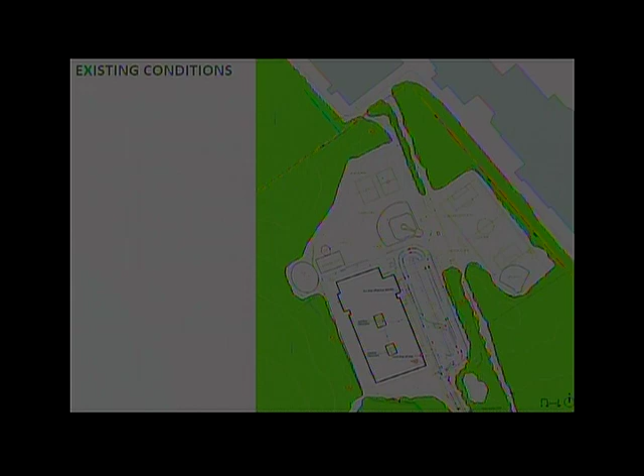We just had a meeting with the outdoor working group and spent quite a lot of time and discussion on this. So I'll just do a brief overview.

We have heard back from you all about how the existing parking lot is managed during pickup and drop off for buses and parents. This is an updated schematic site plan where we've incorporated some additional thoughts about parking and pickup and drop off on the site.

So the entry drive, still a bus loop to the south of the building, combined with the playground, which we've talked about previously here, and then parking to the east, and then a low ropes course and fitness play area that could be used by the gym to the northwest of the gym, a wetland gathering space and wetland walk here to the west of the school, a gathering space in the woods, and then the high school regulation baseball field would be here, and the multi-purpose field would be here.

This is zooming in within the play area that's combined with the bus loop. We were thinking of a combination of net climbers, swings, embankment slides, and stepping stones and logs for kids to climb and stand on. And then some of those low ropes elements here again. Basketball court here and a half court basketball in the bus loop.

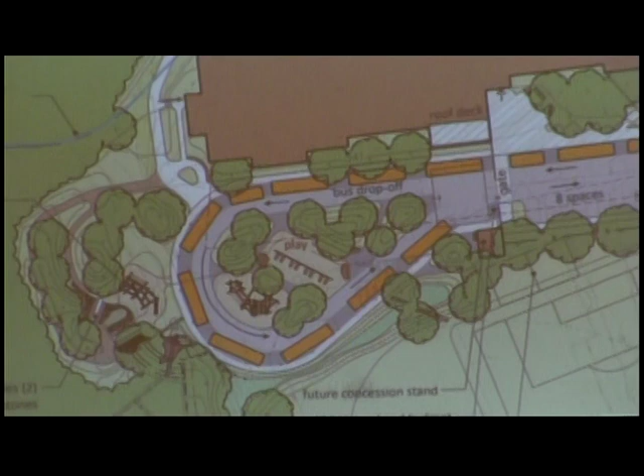This bus loop would be separated from traffic outside of pickup and drop-off times. From the working group meeting earlier, we were discussing ways to do it without a gate, with a chain, or with a raised curb. But when outside of pickup and drop-off, this would be a plowable play space. And then during pickup and drop-off, it would be used as a bus loop for the school.

There was some concern from various folks about this pinch point, so we've been doing some thinking about how we might be able to improve traffic here. The current plan shows buses turning left and then cars coming up in a dedicated turn lane here, turning right. So in this configuration there is limited conflict between left turning buses and cars turning out when the buses are entering the bus loop.

Some options that we looked at were a roundabout, which is pretty complicated and doesn't really solve the problems. And something like this that is similar to the traffic flow in the current proposal, but maybe a slightly different, more modest version of this may help improve traffic flow and ease the turning radiuses for different vehicles. So we probably will incorporate something in between this and what's currently in for the cost estimate.

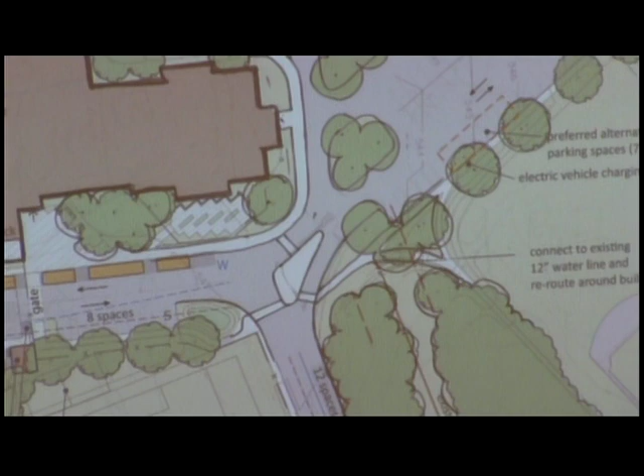We also have the roof deck with some simple planters in the corner, similar to what we have at the Jacobs School. It could be seating, picnic tables, and weather stations could be located up on that deck to keep them away from vandalism. And then another roof deck off the art classroom in the front of the school. So again, free play in front of the school, managed play in the back. Here's some images of some of those elements.

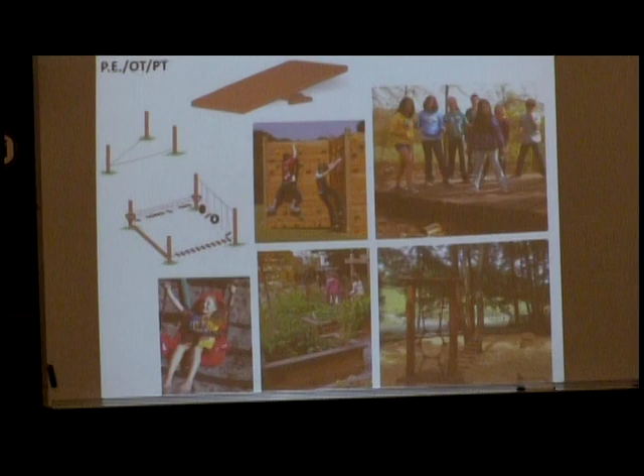Some things we talked about: Gaga ball, frisbee, volleyball, soccer and baseball on the major fields, and then basketball. Traversing wall, low ropes, swings.

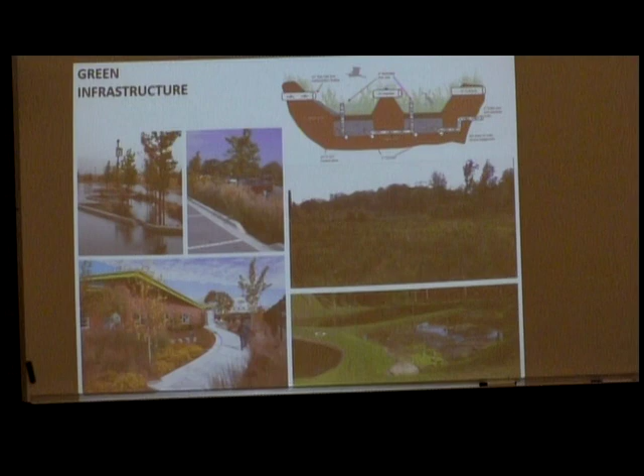So that's where we are with the site plan. Any questions or thoughts? Just about the paths to the outdoor classroom - what were you thinking in terms of how those would be created, maintained? Would they be decked the whole way through for accessibility purposes?

Yeah, we're thinking of an at-grade deck for the length of it. Any spaces in the wetland, potentially not a full deck with piers, but a low-key elevated deck on sleepers that would allow some water flow if we get into the wetland. Everywhere else would be an at-grade deck.

Okay, and was there any thought given to adding some kind of cross-country loop additionally around, like down the driveway and up? The sense for that - right now we have this additional gathering space in the woodland over here. So what we're thinking is that this would be part of the contract, providing accessible paths to these spaces, which begins to set up the framework of a loop.

And then the community could continue that loop into a full 5K course, including some of the existing non-paved paths through the site, like one that goes down, starts at the ball field and goes near that development west of the school. So it would be the beginning of a 5K loop that could be built on.

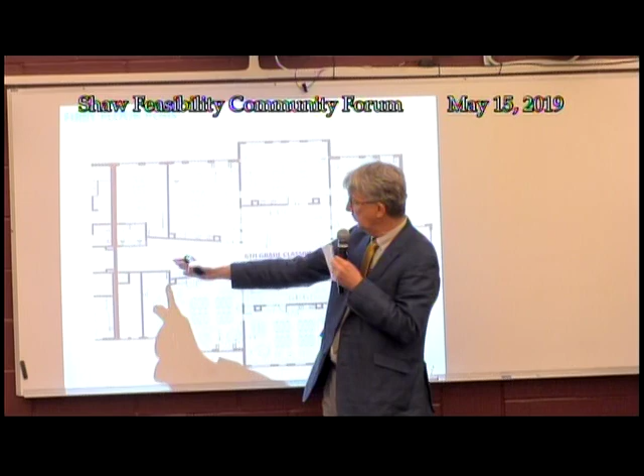So, plan updates. This is just to focus in on the 6th grade classroom wing, 5th and 6th grade classroom wing. So we did decide to elevate that one wing to work with the grading across the site. So just that one wing starting at this point is elevated. This is a slope walkway, not a ramp - there would be lockers along it. So it would be like a graded sidewalk and not a ramp, so there would be no requirement for handrails or anything like that.

And then we started to populate the classrooms with furniture. We're working with a pretty standard modular desk, because there was a lot of debate about use of tables versus desks amongst the teachers. This allows a teacher to configure desks together in groups of 1, 2, 3, 4, up to table size. That's the greatest flexibility for that kind of use.

Just starting to work with the model, starting to render the inside. We did meet with the materials working group last week and came up with an approach for the exterior windows and brick treatment, and the amount of brick on the interior.

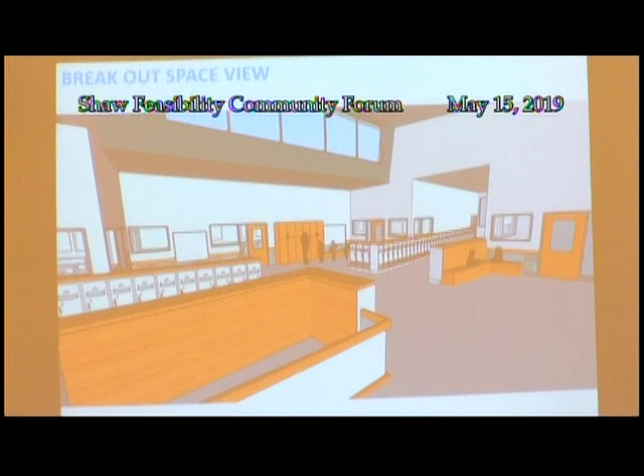A change since last meeting was the slope of the roof over the flex spaces. We had shown the slope of the roof running as a shed roof facing forward previously. Now we're running the shed front to back, which allows us to get clerestory north-facing light into this flex space rather than skylights. So it's diffuse light, there's no glare, and it eliminates skylights, which we think has a real benefit. And I think it reduces the height overall as well.

There will be a lot of wood. The lockers would be encased with wood.

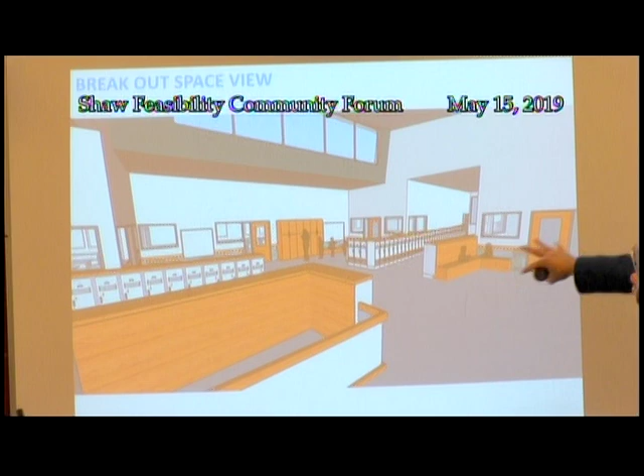These are the flex spaces beyond. This is the opening into the floor that would let light filter down to the lower level, and windows into the classrooms, but up high enough that when children are seated at their desks, they're not distracted by what's going on outside of the classrooms.

The media center. Since last time we met, we discussed with the school a bit more about the need to really secure this room off. We had shown it sort of open and permeable all the time without doors, but there's a feeling that with this school being used after hours a lot by different groups, like the junior high basketball league and so forth, that this room should be securable.

So we've adapted the design a little bit to have doors at either end. There's steps up to doors, and at this point you enter and can run down a slope walkway to the lower level. The media center is depressed about 2 feet, so we get some height in there because the outdoor classroom is above it, and we'll have a bit of a dropped roof structure to support that.

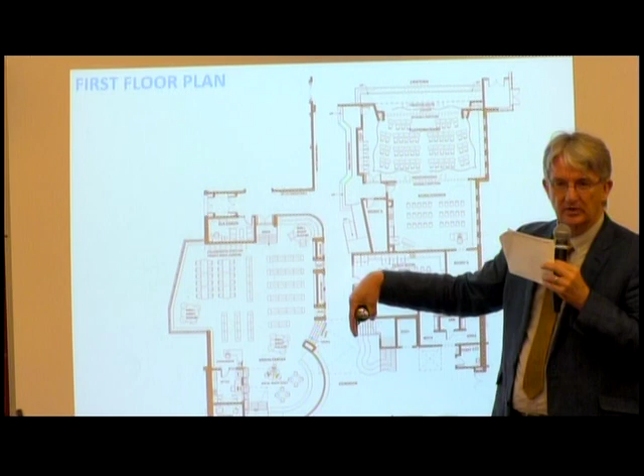We'll have one opening here into the media center that will be stepped, kind of associated with the grand stair that will also expand out to this large seating area in the hallway. This will be gated with either a security gate or something like that. It won't be an egress door, so it can be closed and not open after school hours. Ingress and egress would be through these two doors.

We've also developed the side of the stage. There's an elevated ramp, a true ramp going up to the point at which you would transition to the music room or to the back of the stage.

Along the corridor, we've created this sort of stadium seating for a gathering space as well. So it's not just a hallway—with possibly a whiteboard along here, something could happen in that space along the corridor. And the music room and stage are very multifunctional.

There'll be a horizontal sliding curtain, so it looks like a traditional stage with a curtain drawn. There'll be an operable partition that will rise up out of the way to allow it to be used as a stage, but closed during the day, and perhaps the curtain drawn to allow the music teacher to use this space for music lessons. And then there'd be a back curtain that would enclose the back of the stage when it is used as a stage.

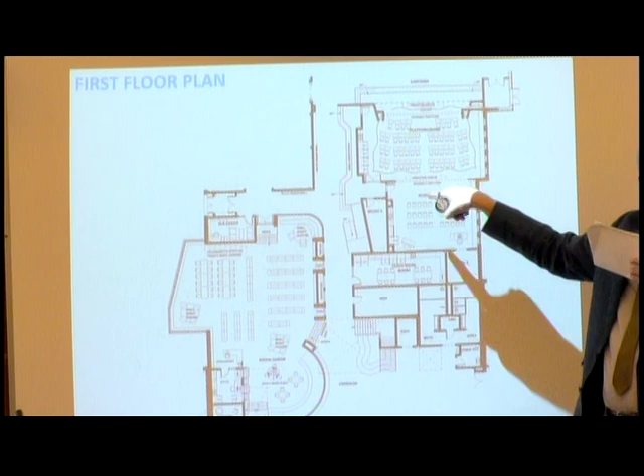We're still working with the school to determine whether there's a need for a movable partition here, but we're showing one now between the two music rooms to allow the greatest flexibility.

Any questions or thoughts? How many students would you foresee being able to fit in that hallway space adjacent to the stage?

Probably a classroom size, I would say, maybe. Kids can squeeze together on those things, maybe up to 2 classrooms potentially. Some kids on the floor.

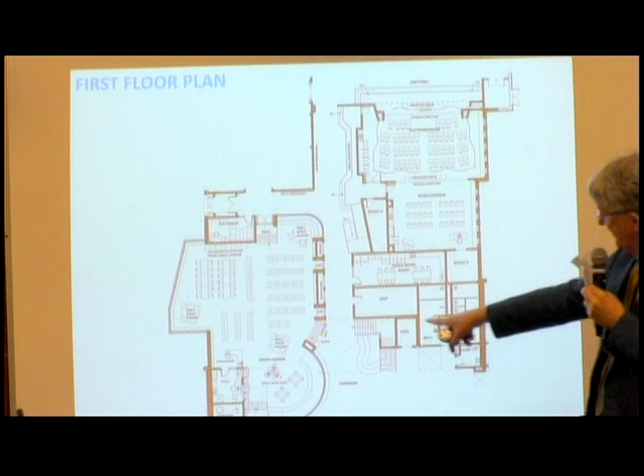So it's just trying to provide multiple places for gathering. So this spot here, this spot here, this spot here.

The gym, so we did bring this up at the materials working group just because it came to our attention that we were showing a junior high size basketball court in our gym, which allowed us to have bleachers that seated 210 people. But we learned that the junior high league really works now with a high school sized basketball court, and they would prefer a high school sized basketball court.

So this is the plan showing the high school sized basketball court in the allotted 6,000 square feet that the MSBA allows. And the greatest number of bleachers that we can get is about 125 fixed bleachers. They wouldn't be retractable or movable bleachers, they'd be fixed on that west wall of the gym.

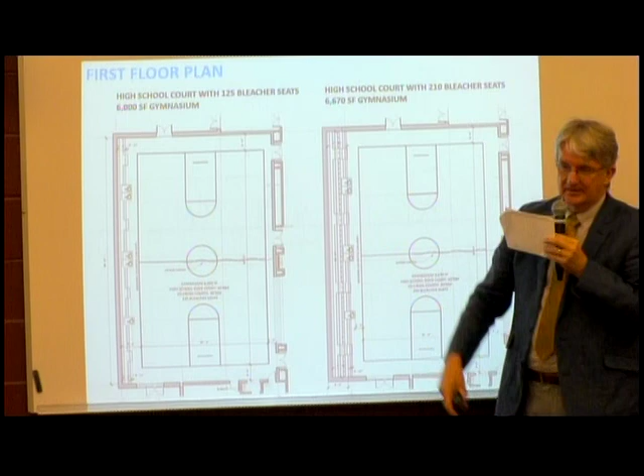So the thought came up about possibly expanding the gym slightly to get back to that 210 number, roughly. And we determined that we could do that and have adequate safety clearances around the court by adding another 670 square feet to the gym. So we are going to price that as an alternate during schematic design and see where that goes. That would be non-reimbursable cost, but it seemed in that group that it's a really important feature for the school and the community, and something that might be important for the success of the project to get to that size and that number of seating.

Any thoughts about that? Thumbs up.

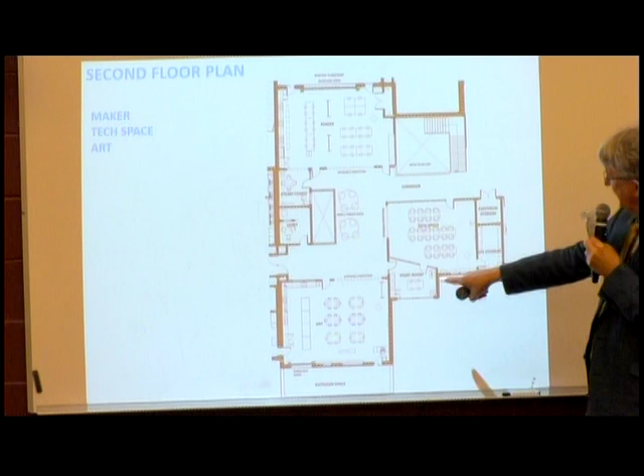Second floor, so we've developed this middle space a bit more. Zoom in on that. So we've got the 2 maker spaces on either side of the central corridor, the art room here. We're showing a shared print room between these 2 tech spaces off the corridor, and also accessible from the corridor for other people. So this might have the 3D printer and that kind of equipment in there.

We're meeting with staff to talk about how these 2 spaces might be fit out, whether they're the same or a little different. But we are looking at operable partitions in each of these spaces that would allow them to open up and flow into that main corridor.

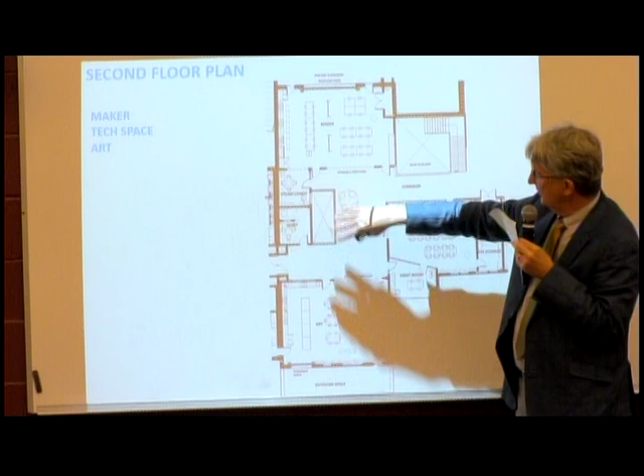We do have a big opening in the floor here. We'll have some daylight from windows here coming into this space down to that main stair. Another opening here that lets some light down to the library, media center. Large operable exterior door going out to the rooftop classroom, and 2 means of egress from the rooftop classroom, 2 means of egress from this room to the corridor.

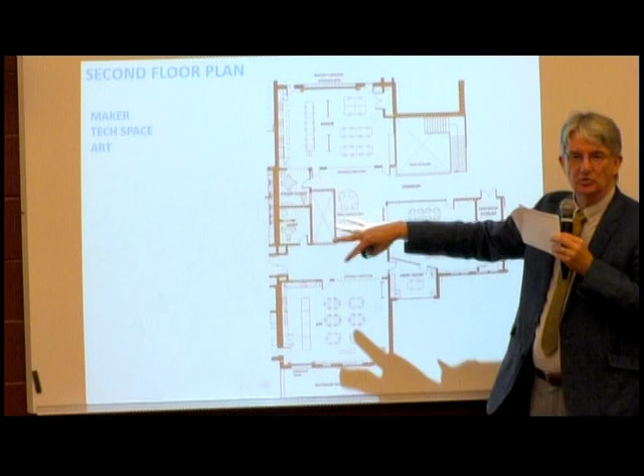And yeah, that's about it. And large enough space for other things to happen in this central core space in the corridor, and not just be a corridor, some small group gathering spaces near that opening in the floor.

So we talked with the materials group about different types of operable partitions or where we might use them and employ them. So this is the exterior. We reviewed 3 options, and this is the one that folks decided to go in the direction of. It's basically a single unit that just rises up, half interior, half exterior, cantilevered. And that would be the one at the makerspace out to the rooftop classroom, and then also the art room to the front rooftop area.

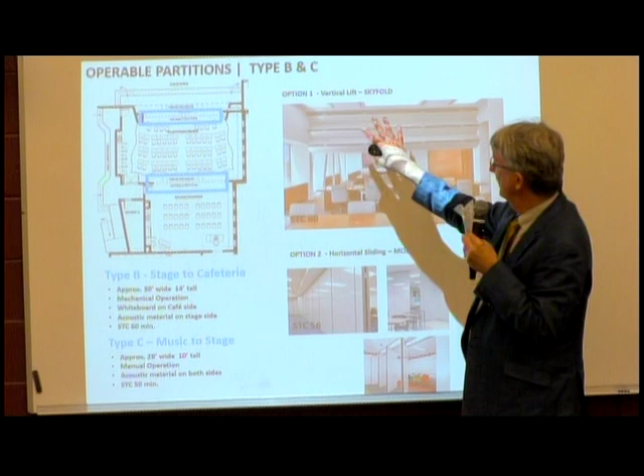And then interior, operable partitions. So we're looking at this skyfold door, this kind of door. It's an accordion door, but it's got a high STC rating that would drop down and close the stage. This can be whiteboard material or acoustical material. So this would close and allow this to be used as a classroom, and open and disappear and allow it to function as a stage with a horizontal sliding curtain in front. There'll also be a projection screen out front here that would drop from the ceiling.

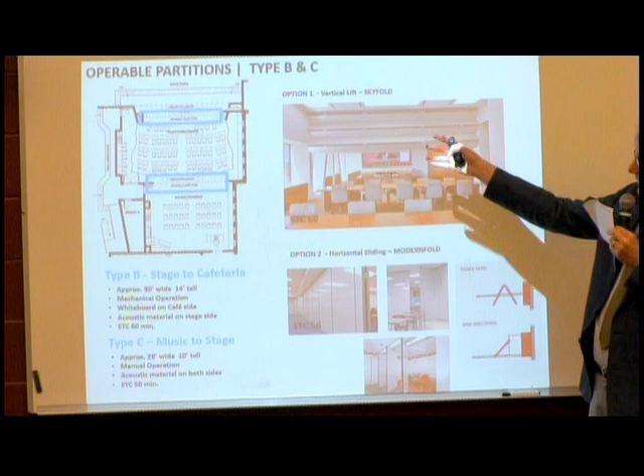And then, again, we're still discussing whether there's a need for an operable partition or whether this could be a permanent wall here. But if we do an operable partition, it would be this kind of demounting 2-panel system, a manual system that would move off to the side. So this and the 2 previous ones that we showed for the exterior use would be mechanically operated.

All interior classroom to corridor partitions have to maintain a minimum STC rating of 38. This glass folding partition is similar to the previous ones I showed, demountable in 2 panels each, manually put aside, except these are glass.

We showed several options of these to the materials working group, and folks liked the one that didn't have a floor track in it, that didn't require anything on the floor. So we'll be pricing those out for schematic design.

Any questions about that stuff? So then at the first meeting we had with the materials working group, the group focused in on a few images we brought of 3 projects that were very traditional brick, predominantly masonry. Of course these all had sloped roofs, and we've made the decision to move away from sloped roofs to save costs. So we're still trying to work with this aesthetic of mostly brick and some other material.

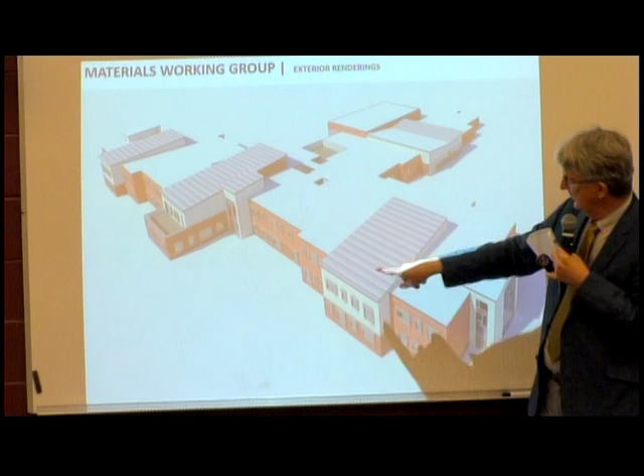So this is the beginning of what this is going to look like, or might look like. As I said at the last meeting, these roofs we had sloped, so the high end was off to the side and the low end over here. You saw at the front the sloping gable. But what we thought would be nice would be to slope them front to back.

For one thing, to get daylight into the flex space in the classroom corridors without skylights, using north-facing light, and also to have all of this roof area that's shown sloped, including here on the cafeteria, be free from any mechanical equipment and totally dedicated to photovoltaics.

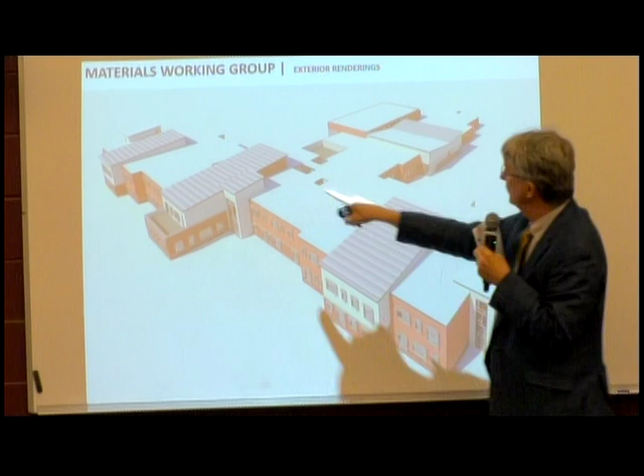So all the mechanical equipment would be on the flat roof sections in between. A stair would bring you access up to here, and because these stop at the back side of the flex space, you can move across them to the other roof areas, and from here to the rest of the roof.

We think that would be pretty dynamic and a real statement on the front of the building, having the PV there. So we're detailing it out mostly brick with an alternative material right now that we're specifying as a metal shingle, sort of a diamond shingle, brick pattern, kind of a Flemish bond, and screens on the windows, shading screens that shade the east angle morning light and also southern exposure.

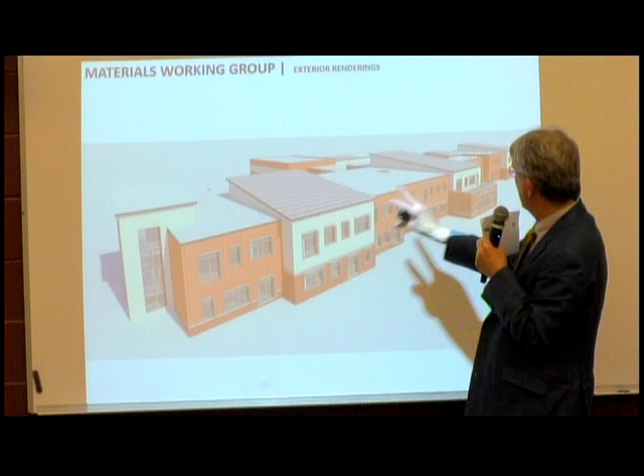A little closer in, a little detail in the brick from the windowsill up, a different type of treatment at the base that might rise up here, where we change materials at these pop-out areas with a sloped roof, that might be metal. So pretty simple form, pretty simple structural grid, and pretty economical overall.

This material, we showed several materials in the past, GFRC, a concrete material, or metal, and they price in about the same range. So if we decide to change that in the future, we can change that as design develops.

So that's an angle from the southwest. The bus loop playground would be right out here, and the main entrance is over here. This is the east classroom wing. You can see the roof steps up here slightly for that 2-foot grade difference over there.

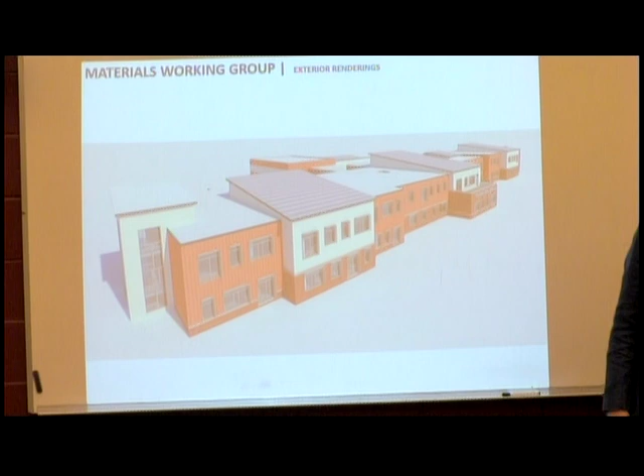And then again from the opposite direction, from the southeast looking toward the building, the main entrance. We haven't developed the entrance canopy yet, we're going to spring that one on you later, but we'll carry a budget in schematic design for that. We just haven't been able to focus on that yet, but we will have something interesting there, and probably will incorporate some bicycle storage under that as well.

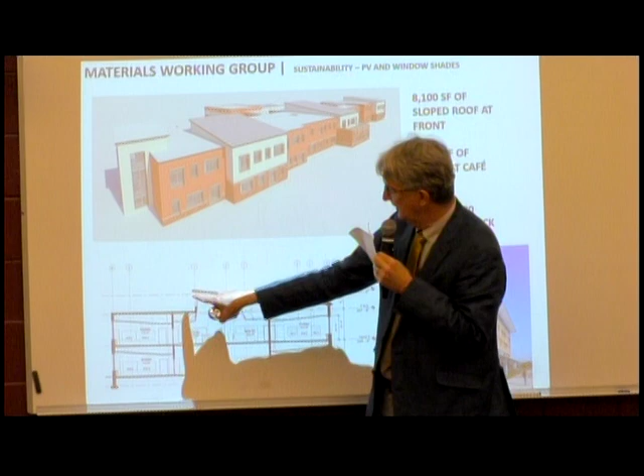So this is just a section showing you how that roof runs from the front, slightly higher than the flat roof, runs from the front to the back side of the flex space with those north-facing windows letting the light in, which you saw in that rendering. This being the whole flex space in the corridor running down the middle, classrooms either side, lots of room here for running mechanical equipment.

And we determined just with the slope roofs alone, we can get an 81 kW photovoltaic array, about $250,000 cost roughly, and a 9-year payback.

So right now we're looking at specifying a window shading device, something like this, that could evolve as we get into design development, but it gives the opportunity for adding some color perhaps. And the windows themselves could also provide an opportunity for color. So in the classroom, every classroom has this series of windows, and that large window is the one on the interior that was the window seat that had the feature surround on it in the classroom space.

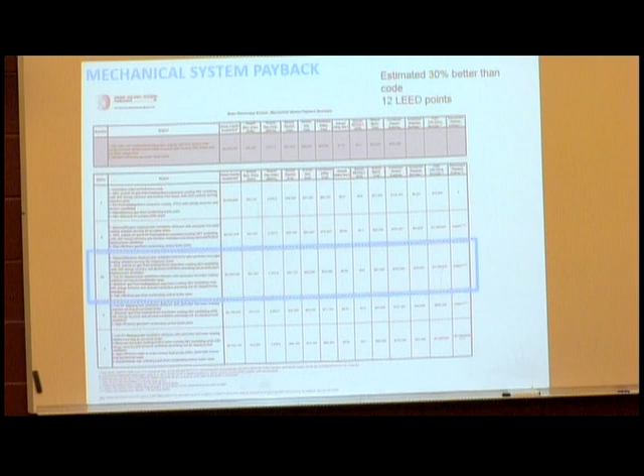So, mechanical system payback. Our engineers were here a couple weeks ago. They've taken our model and all of the design elements, the building envelope, and looked at several systems. I handed out a sheet, and what we're carrying forward is option 2A, which is the displacement dehumidification system.

It also air conditions certain spaces: the cafeteria, the gym, the media center, administration, and special ed spaces only. It's a slightly higher cost than option 2, which is only dehumidification with no air conditioning, but not tremendously more, and it has an instant payback.

Their estimate is that it will perform 30% better than code and will achieve 12 LEED points in optimized energy performance, well above the requirement for MSBA for the 2% reimbursement in that category.

Any questions on that?

So, alternates we're going to be looking at. The first one is the one I introduced earlier, the expansion of the gym to achieve a larger count of bleachers. We thought, at least for information, we'd bring this at the end of schematic design for inclusion or not, but for consideration. Then there's the shed exterior to the building, which we're showing off the rear of the loading area, not far from the generator and the transformer.

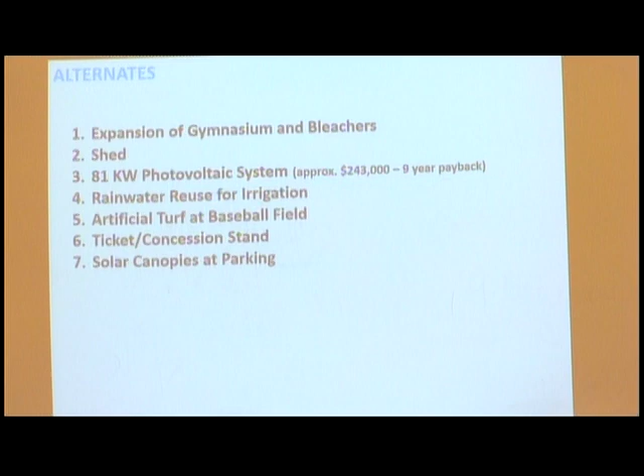And we'd also have to bid it — public bids take the alternates in order. You can't take item 3 without also taking items 1 and 2. So it's a decision you really need to think through and decide how you want to participate in doing these.

If photovoltaic is a major design element, you might want to say the ones you see on the roofs become part of the base bid, and if you want to go beyond that maybe on PV, that becomes an option.

I'm going to say expansion of the gym is something that's very important. The shed is too, but you can only take so many in given bids, so it becomes something you need to think through and prioritize.

So, proprietary items — we've brought this up in the last couple of meetings. We have basically 2 items that we'd like a vote on for proprietary items. I think the building committee votes on this; the building committee needs to vote, and then ultimately the school committee has the ability to vote. So that's the motion, and those are the 2 items that need to be voted on if you care to take that vote now.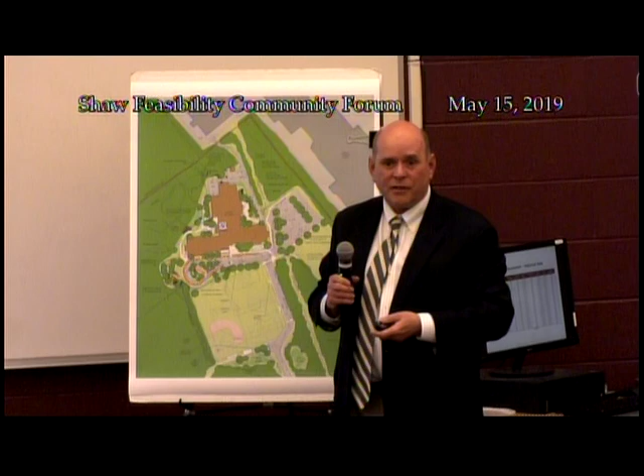We're not going to really know what the final numbers are going to be until we get the estimate and work through all of what is eligible and what isn't. That's why I want to bring it to the community so you're not shocked when you see us coming through and saying, yes, your reimbursement rate is 61%, but when you talk with the community at the vote, they should know their effective reimbursement rate is going to be something less. That's really the story we wanted to bring tonight.

So not knowing what was ineligible for Douglas, they were at 62 and ended at just above 50. They're sort of in the same range. Historically, you look through and every project has a different story, but you're looking at a 10 to 12, sometimes more, difference between what the MSBA says your reimbursement rate is and what the communities actually got.

And for instance, the more of those alternates you select, the lower your effective reimbursement rate is going to be. Those will be carried by you 100%.

So I just want to be clear, because it kind of sounds like a bait and switch going on here. That's why we wanted to bring it up.

So over the next 7, 8, 9 months, one of our talking points in the community is going to be we're eligible for 61% reimbursement. We're shooting for 61%, 61%, 61%. That's what we're going to keep repeating. And then we could literally come in and get 50% reimbursement. You will, yes, you won't get that 60%. Then why would we keep telling people that we're eligible for 61%?

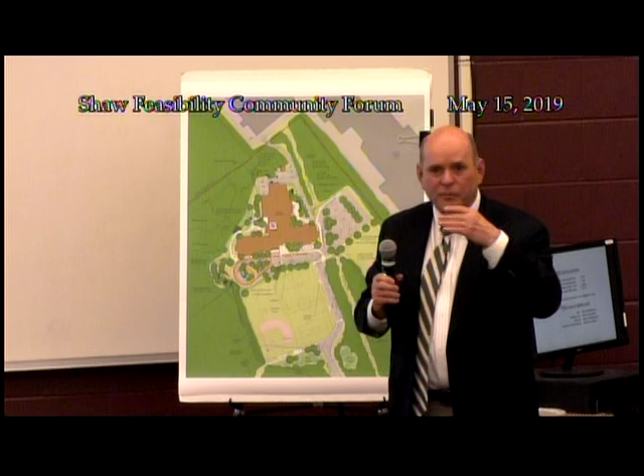That's why it's very important to make sure we build everything the community wants into this estimate, that we make all these design decisions at schematic design, so we have a confident feeling that we've got enough money in the budget to build what it is that we're presenting to you.

So one question is, we carried over this slide into the community forum, and whether you want to present that. I guess, to the Chair, I want to present this to the building committee. Is this something we want to discuss with the community?

It's usually something we discuss once we have the real numbers, and we explain to them what the reimbursement really is. Usually at this point we're more focused on the design and what a wonderful school it's going to be, as opposed to getting into the nitty-gritty of reimbursement. It's part of the presentation, but we can put it toward the back of the deck if that's the will of the committee.

I think maybe putting it back for a while. Okay, I'll just eliminate these slides. Yeah, you can just take it out, because I had gone through the budget thing in there already. So, very good, because we don't really know the number ourselves.

Well, that's why I wanted to make sure we're not giving you an estimate at this point. I don't want to put a number out there, because once we get everything in, it's going to change a bit, and I don't want to put a number out to the public and have it change. I agree.

Okay, very good. Oh, we still got to adjourn the committee. Oh, really? Okay, I'm just... No, we'll just wait, we're going to bring this up.

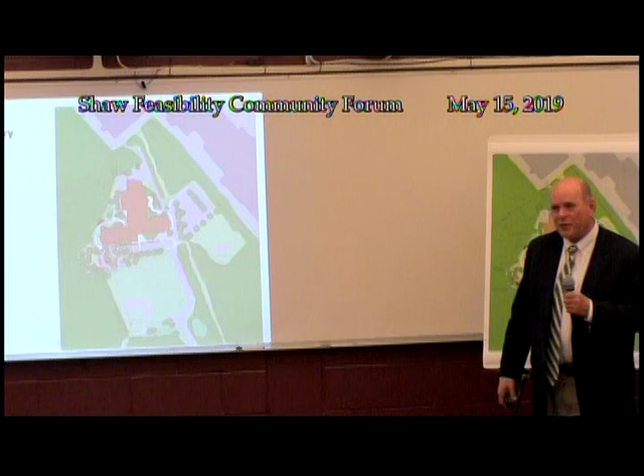There we go. Thank you very much, Greg, and thank you, everyone, for coming. I'm David Billings, I'm Project Director at Hill International. We're the OPMs on the project, and we'd like to do a quick recap of the process we're in.

As you know, we've been invited and we're partnering with the Massachusetts School Building Authority to build a new Shaw Elementary School. This is the project team. We're really working with the community and through the community to do this. Hill is the project manager, and T2 is the design architects.

The town was invited in 2017 into the MSBA's core program, one of only 15 communities that were invited that year. So you can see this is a very competitive market to get into the MSBA core program, and it was very exciting for the community to do that.

The MSBA invited the town to look at two options: a grade 4 to 6 school for 415 students, and a grade 3 to 6 school for 550.

We've gone through the eligibility period and then started the project team. The project team came on in spring and summer of '18. We have completed the feasibility study, and the conclusion of that is to build a new school for grades 3 through 6.

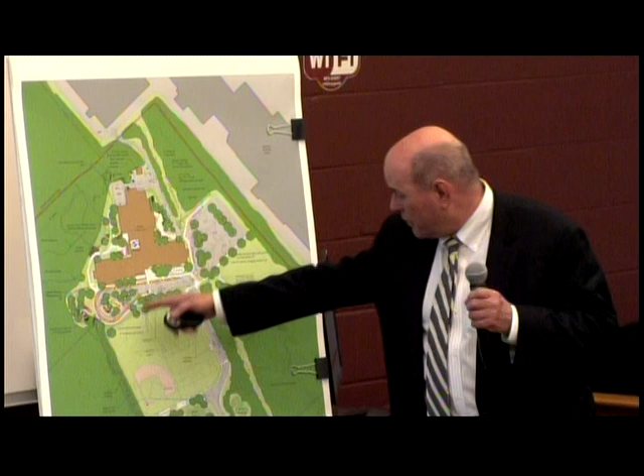Then we'll take down the existing building once the kids are out at the end of June, and construct the fields and the rest of the parking lot. The building will be open for the fall 2022 school year.

During the schematic feasibility study, we looked at all the different options: renovating the existing building, doing additions of various sizes and different grade configurations. We looked at two different building options, and the decision was to go with option C5, which is this design. We did cost estimates of each of the different options.

We're now looking at an option for C5 that's between 56 and 58 million dollars in terms of total project cost.

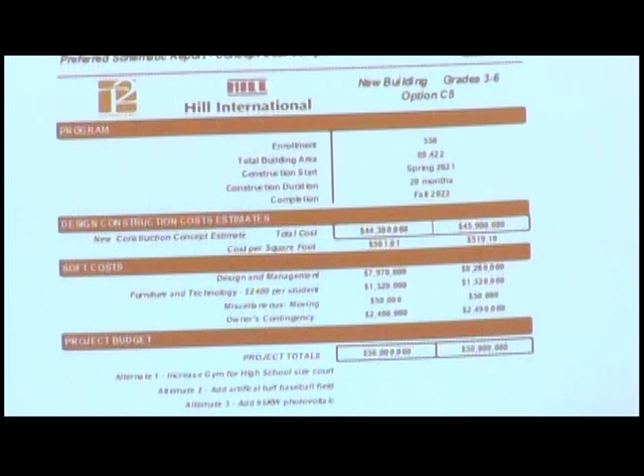We're looking at a bunch of alternates, but this is the concept cost that we've developed, and we think we're going to be fairly close to this. We will be presenting our final estimates and project budget to the building committee by the end of June, so that we can submit to the MSBA in July to make their August board meeting.

And on that, I'm going to turn it over to Peter.

Hello, everyone. I'm Peter Churowski, Principal Architect with T2 Architecture. I'm going to turn it over to our landscape architect right away, Peter Flinker from Dodson Flinker Landscape Architects.

Just to orient you, this is the existing school building, the existing parking and bus turnaround area, and ball fields to the north and east. As you know, the idea is to keep this school open, so that limits the options of where you put the new school. It's been determined to put the new school in the north part of the site, keep this school open, and then when it's done, tear down the old school and old parking lot and replace them with a large combined baseball and multi-use field.

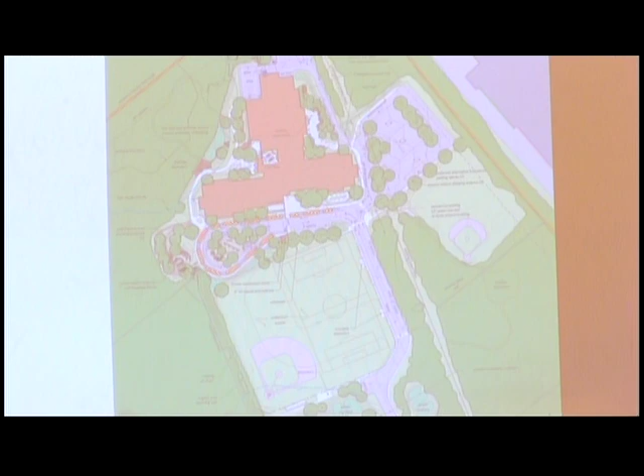The idea is to keep the existing pavement along the edge as the main arrival to the campus, and then when you get to this point, the buses will go into a bus loop—buses only for drop-off and pickup. All parents, visitors, and teachers will go to the right and park in a parking lot to the east side of the school, with drop-off following the outside of the parking lot, dropping off in front over there.

Here's an easier view to see—essentially 3 lanes approaching the school, or 2 lanes approaching and 1 departing. Buses turn to the left into the bus loop. Parents and teachers pull around here, so there's plenty of room for parents to queue up along the sidewalk and drop off in the morning.

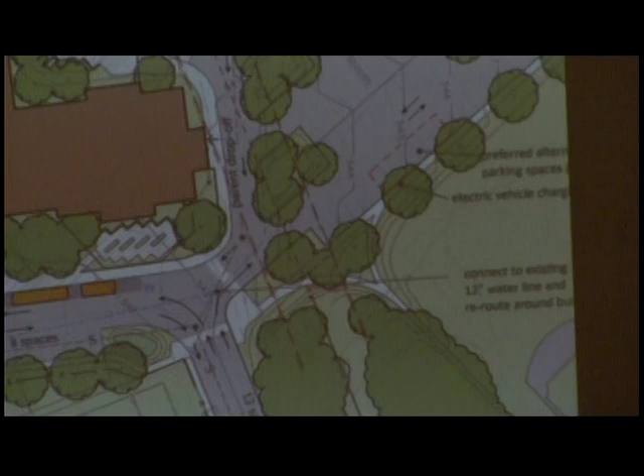In the afternoon, if they need to park and go into the school, they can use these parking places on that side. The idea is to separate bus and car traffic. This also provides the benefit that after the buses drop off—which is a relatively brief period in the morning—this area can be closed off with no more traffic, becoming part of the recess playground system. They can use both the hard surface of the paved bus loop and, within the center of the loop, space for play equipment.

We've been working very hard with the committee to figure out what kinds of play equipment might be appropriate, what's needed for the different levels of school children, and so on.

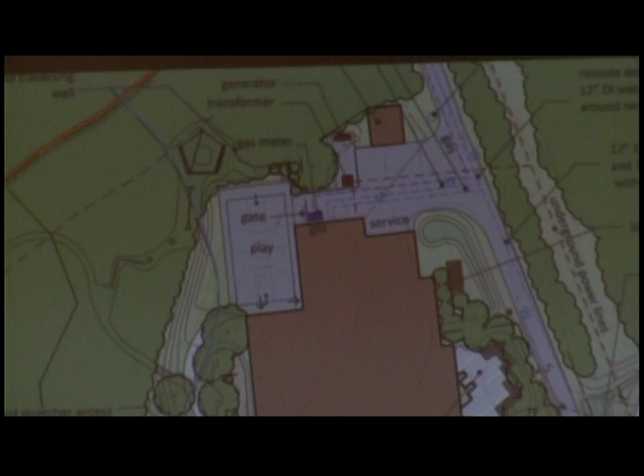There's wonderful opportunities for outdoor play and outdoor gathering spaces around the different parts of the school. On one side there's a general arrival space and an outdoor space outside the cafeteria. On the north side there's service access, truck drop off, and transformers, keeping that out of sight while providing convenient access to the cafeteria and kitchen. Outside the gym will be a paved basketball court and outdoor play area, which also opens up opportunities to use space within the woods for a low ropes course and other ideas that bring kids out into the landscape as part of the school curriculum.

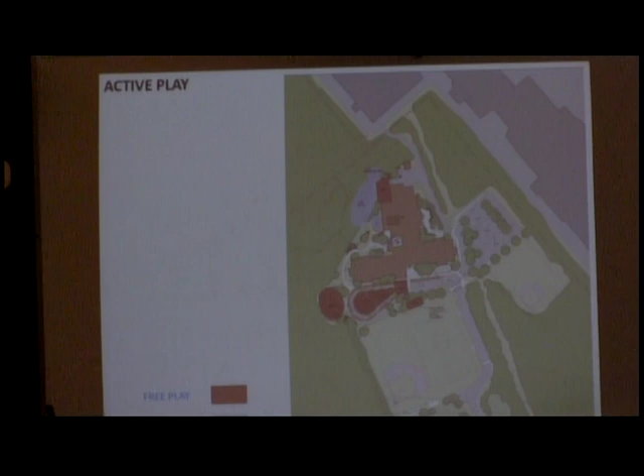During recess, students will come out in several different areas. Younger students will use the large playground area immediately outside the 3rd and 4th grade classroom wing, while older kids can use the ball fields and possibly a volleyball court and gathering space. Outside the center wing will be a courtyard that could be used for physical therapy and occupational therapy, along with garden spaces and outdoor classroom spaces including water-related experiments and water play, plus access to a nature trail going out into the wetlands. This is a diagram of that, with red being active play areas for free play at recess, and blue being physical education and occupational therapy spaces.

We're in the midst of looking at lots of different options, a lot of interesting things that could happen at this school because it's surrounded by so much interesting open space, this wonderful forest, and a rolling landscape. So we want to incorporate the new equipment to really literally fit into that surrounding landscape.

Instead of slides that are freestanding, we can set the slides into some of the slopes. Instead of just climbing up the edge of a slope, we can have stepping stones or stepping logs, and structures constructed out of logs with nets to provide maximum interest, engaging both the body and the mind. So rather than the same kind of play equipment kids have seen everywhere, it can be much more engaging.

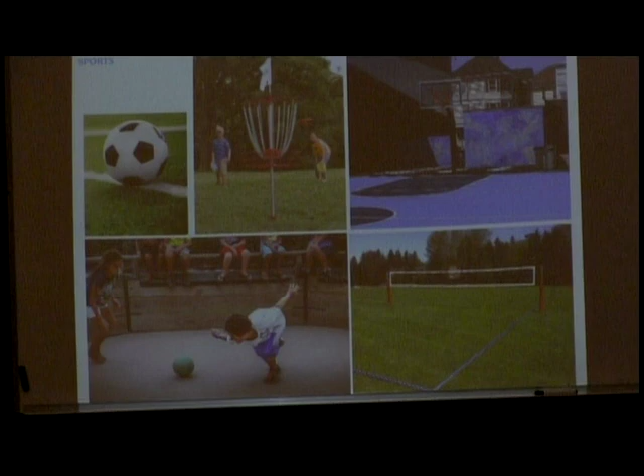In terms of active play, we're looking at different elements such as volleyball and basketball courts, but also possibly disc golf and even a gaga pit, which you should ask your children or grandchildren about if you've never heard about it.

As part of the school curriculum, we're thinking of having a low ropes course, which provides opportunities for kids to get out into the landscape and solve problems and do activities together. This would happen in some of the outer areas outside the gym. On a balancing table, you learn to work together to literally balance that rocking platform. There can be traversing walls designed as climbing walls, but instead of going up, you go across—engaging activities that help kids learn about using their bodies while having fun.

Then there are more formal gathering and outdoor education spaces. We already talked about accessing the wetlands north of the school with a nature trail. There's also a wonderful opportunity to bring a trail out into what's essentially a natural amphitheater in the woods south of the existing small ball field.

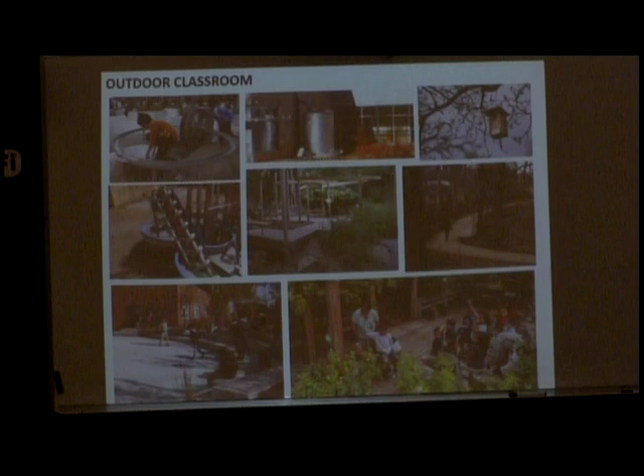Outside the school itself, there's a series of entry plazas and potential garden spaces and outdoor classroom spaces, bringing the activities of the school into the outdoors. One idea is to build on the history and culture of Millbury by celebrating the use of water and water power, which kids learn about in class, but then can actually use and play with—water stored in a tank coming off the roof and released into a variety of engaging activities where kids can learn how water power works and operate different machinery.

We're really trying to incorporate this idea of green infrastructure, which is going past the traditional gray infrastructure of a catch basin and a pipe going out to a stream, and replacing that with spaces that capture the rainwater in a more natural way, where you have a garden that also is holding rainwater.

That can look like this in a parking lot. It can be a low spot at one end of the parking lot that helps hold the water, but is also filled with plants and flowers. In the landscape, you can have areas that look like natural wetlands, but they're also carefully constructed to hold that water and prevent stormwater erosion, while also providing an amenity to the campus of the school.

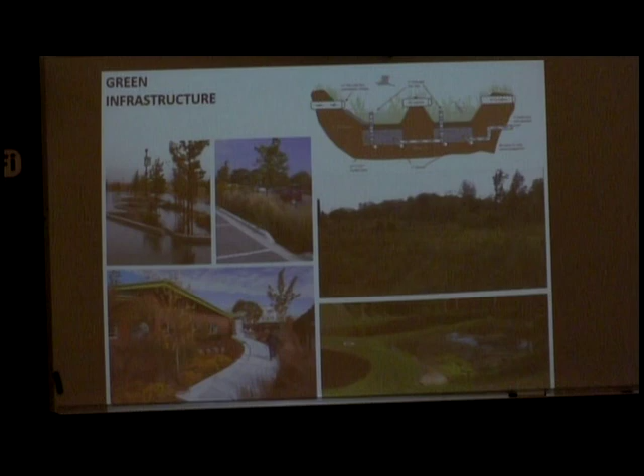And that's the end. We want to take any questions about outdoor spaces before we turn our attention indoors? All right, then.

I'd like to say that we've been working with this building committee, but we've also been working in small working groups, which have included people from the building committee, staff from the school, and members of the community on topics like outdoor uses, the ball fields, sustainability and sustainable features of the building, security, materials, and durability. There's been a lot of individual small group meetings to work toward these solutions.

So this is the final plan as it's developing. It's a 2-story building, and again, it's for grades 3 through 6. So grade 3 will be moving up from Elmwood and joining the Shaw School.

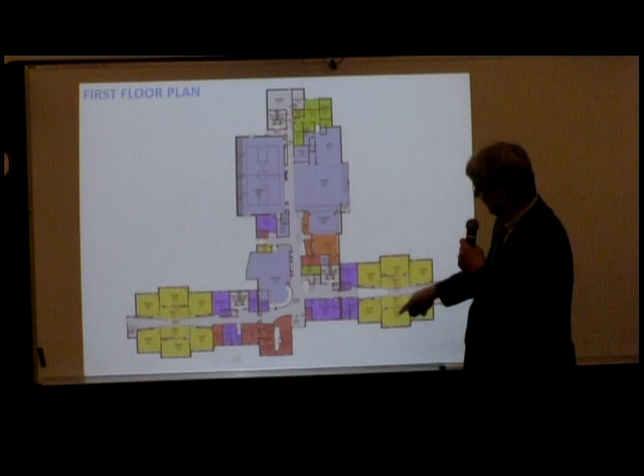Essentially, the building will be designed with a classroom wing at the front with administration in the center and a main entrance. This entrance would be the secure entrance, the only point of entry during the day, with good visibility into the office and a 2-step system of entry into the school. An SRO office, so the school resource officer would have a space here at the school as well.

On either side would be classroom wings. The classroom wing on the left would be grades 3 and 4, and on the right would be grades 5 and 6. The classroom wings are grouped with basically 6 classrooms per grade, in all grades but 3.

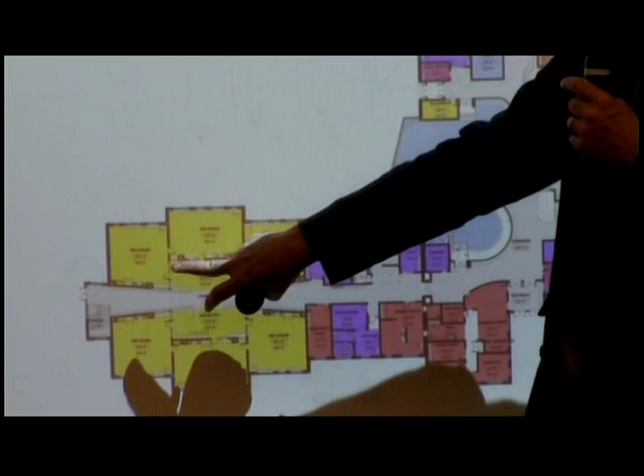The way the school functions is that they team teach, so there are 2 teachers for a core group of children. One teacher focuses on math and science, and one focuses on English language arts and social studies, so the children move between those 2 classrooms. The 3rd grade would be in their homeroom.

Exterior of the classroom is a shared space for small group work. Education isn't like it was when many of us went to school, where we sit at a desk and the teacher's up at the front pointing to a lesson on the board. It's much more dynamic, with a lot happening in a classroom and different group sizes working collaboratively, so this gives the opportunity for small groups to develop out here, maybe even across classrooms.

The purple in the plan are all the support spaces, so tutorial spaces and special needs spaces close by to the students they serve, unlike some of the older schools where they were off in a corner at the back of the building. Again, administration and health right at the front.

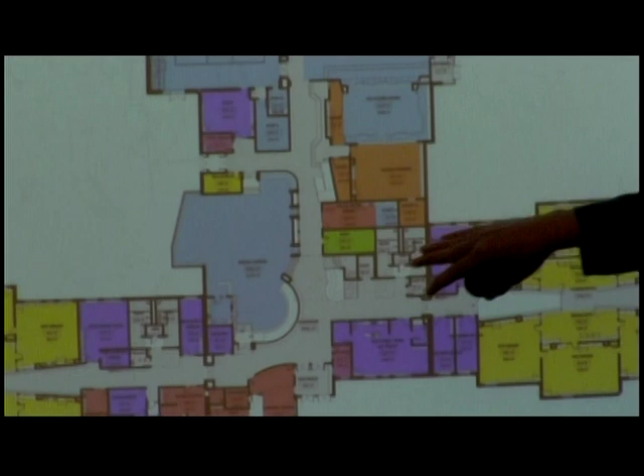The media center is right at the heart of the building. Right now at Shaw School, the media center is sort of in the middle and separated from the gym and cafeteria, but it would be very useful for the very active after-school program. This placement in the core of the building with the cafeteria, the gym, and the media center makes it much more functional for after-school and community use.

Essentially, this blue section of the building is the community use section: the media center, the gym, the cafeteria and kitchen, and a stage. And the building could be secured off here at these wings, so nobody could get beyond there after hours.

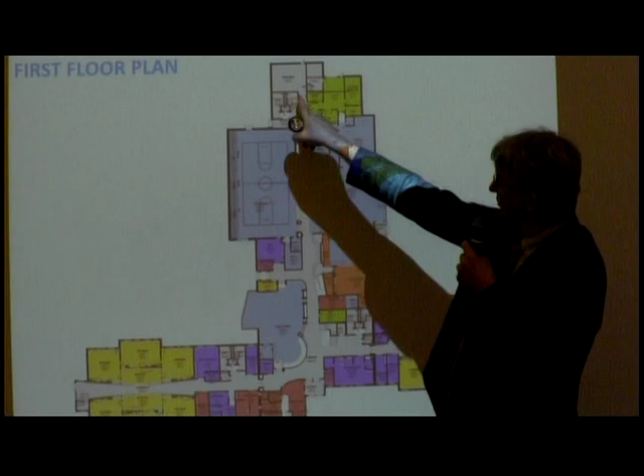There'd be a separate entrance into the cafeteria. There's also an entrance from the outside to the back of the gym where there are restrooms and an interior door that's locked, so this could be used possibly after hours when there's a game in the field and restrooms are needed.

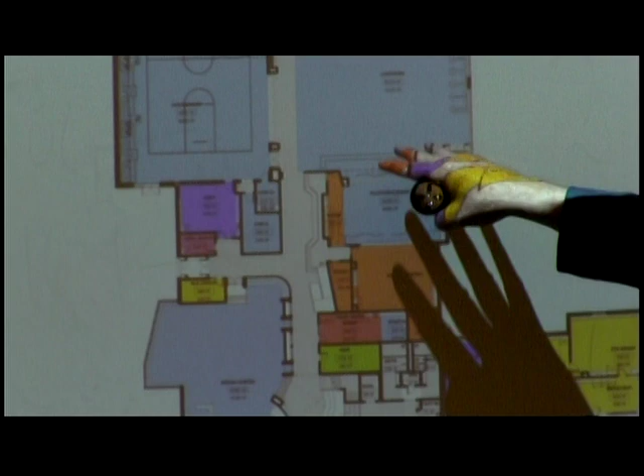So a large gym that has a high school-sized basketball court to serve the junior high and other community leagues. A large cafeteria with a stage, which is shared and paired with the music room, so the music room can expand into there, and this will be a very flexible space with movable partitions that allow it to segregate off and be used in different ways. And a large welcoming stair at the front, and then fire exits at the end.

This is a close-in look at the typical classroom cluster. So we're working with pretty standard, economical modular furniture that can be arranged in a variety of ways, clustered together to create table situations for group work or individual desks, or just grouped in numbers of 2 around the room.

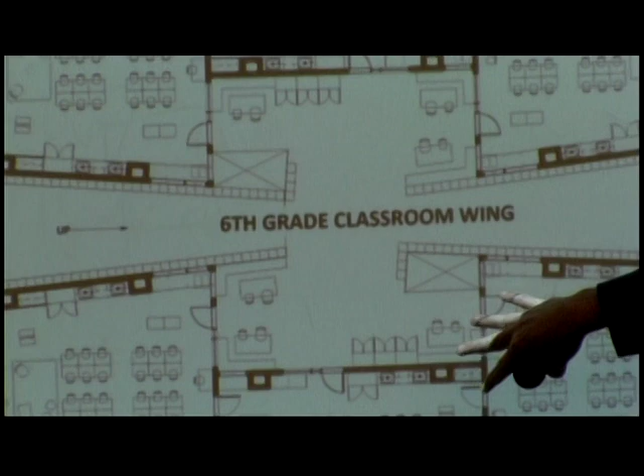So these are the individual classrooms surrounding the core flex space. There'd be individual little tutorial spaces right outside the classroom doors here where students could meet with a special instructor, or work independently outside the classroom with good visibility, a lot of glass here so teachers could keep an eye on students working independently.

One thing I didn't point out is that the main axis of the classroom corridor runs east and west. So all the windows are facing either north or south, which is the best orientation for solar control and glare.

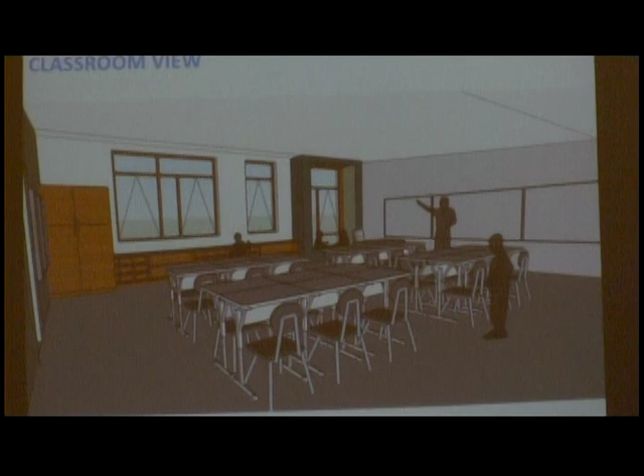This is a quick view of what the interior of a classroom might look like toward the window wall. We're trying to work with a module opening of 8 feet or less that will allow simple construction methods for supporting the openings on the exterior.

We're using a lot of brick, reflecting some of the mill buildings in town and mill architecture, which have very standardized mill punched openings in brick, but making it a little more playful with different breaking up of sizes, and one special window in every classroom that might be a window seat where kids could gather and work together in a small group.

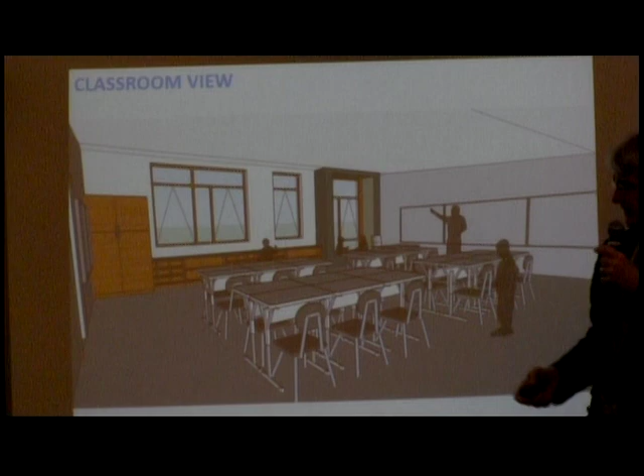So trying to develop as many of these smaller spaces where things can happen aside from just the general classroom.

This is the flex space that's at the center of a classroom cluster of 6 classrooms. So the corridor runs through, but you can see it flows together side to side. The lockers separate off these small spaces outside the classroom where teachers could keep an eye on students or specialists could work with a student.

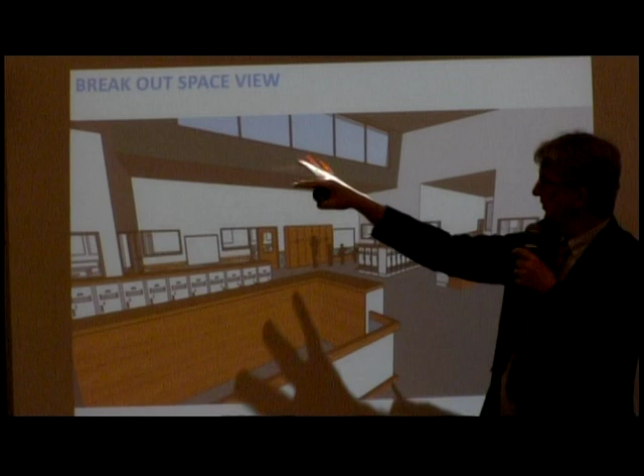We're developing this idea of a clerestory, letting light in from the north, so there's no glare, it's indirect light. It's a nice diffuse light that will filter into the center of the school and down below through these floor openings to the first floor as well.

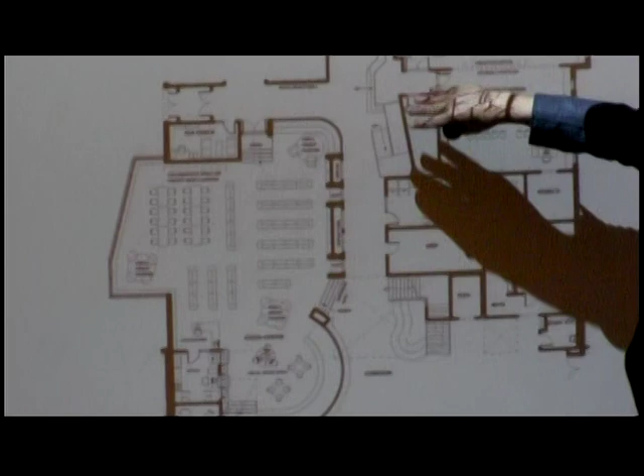Really zoned into distinct areas for different kinds of activities to happen within that space. A large central stair that will expand to another gathering space here. Then along the pathway back to the cafeteria and gym, we're elevating the stage and the music room, taking advantage of that elevation outside these walls and creating some stadium-like seating along that corridor for more flexible gathering space within the school.

So gym size, we've been talking about the size of the court requirements for the junior high league and the optimal number of bleachers for community use and also for school use. The MSBA in their formula of space for elementary schools allows a 6,000 square foot gym, which is smaller than the gym that the Shaw School has now by about 800 square feet—806 to be exact.

With a high school size basketball court, which is what the junior high league uses now because that's what is at the Shaw School and what they desire, it really limits the ability to provide bleachers on one side of the gym. We can get about 125 seats with fixed bleachers on one side of the gym.

So by expanding that gym, not quite as large as the gym that the Shaw School has, slightly less, we can get up to 210 bleacher seats, and they could be also retractable, so they could be pushed against the wall and open more floor area.

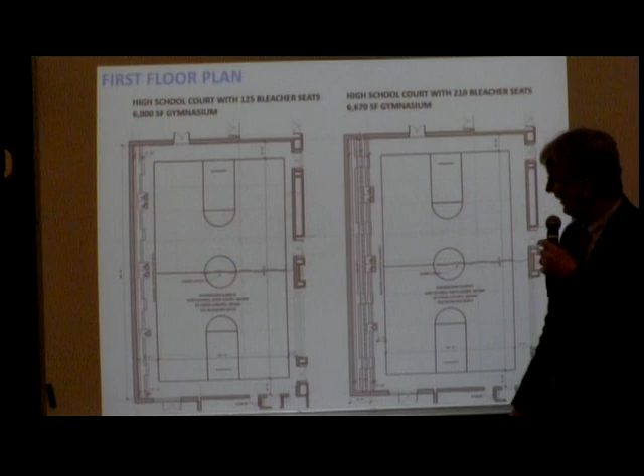So we're going to be looking at the added cost of increasing that gym slightly, because the building committee thinks it would be more functional and useful for the community to have more seating in the gym. And then the second floor, very similar to the first floor, classroom pods, classroom clusters at the end with the flex spaces in the middle.

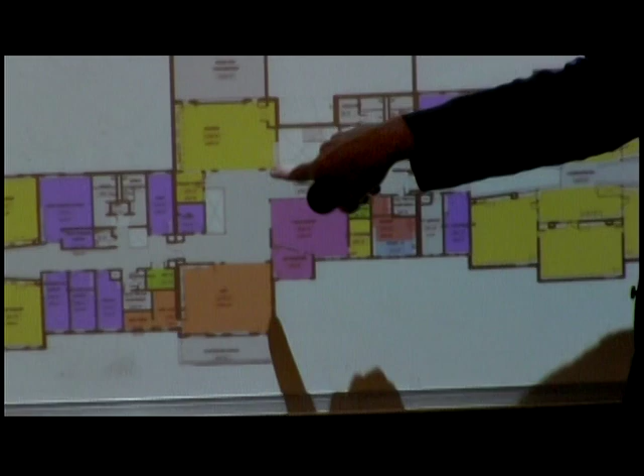So this is 6th grade, this is 4th grade, special needs and special instruction tutorial spaces close to the classrooms. And at the very heart of the school, up that main central stair, there'd be 3 shared spaces: two STEAM technology engineering rooms or maker spaces, and the art room at the core. One of these maker spaces opens up to a rooftop outdoor classroom.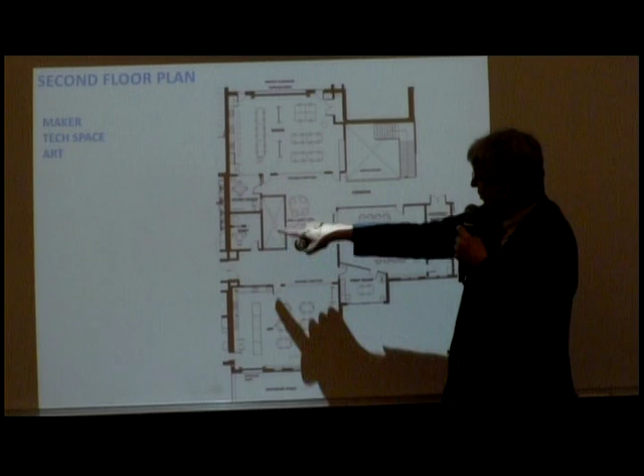So this is a blow up of what that might look like. Right now we're planning on this rear maker space having an operable door that opens up to a rooftop classroom. It really expands the space to be twice the size, functioning between the exterior and interior. Also operable partitions on the interior of these spaces so that this central core area can all open up together and maybe function as a larger whole.

Some flexible use space in the middle. A shared print room for 3D printers and that sort of thing off the corridor, so it isn't just used by these maker spaces but also can be used by teachers in their classrooms, bringing students there. So a pretty dynamic space.

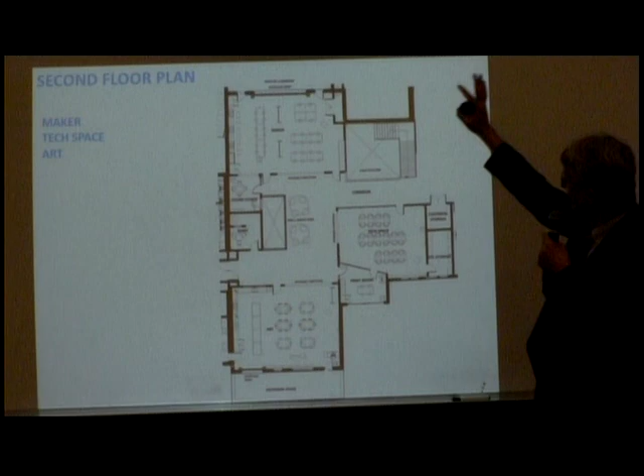And a lot of light filtered from above. There'll be clerestories letting light into that stair, and also through here down into the skylight, letting light down into the media center.

So we've talked a lot about materials and what the building should look like. Really came with a core working group that we're working with, and the building committee really settling on brick as being the major material component of the exterior of the building, trying to achieve a rather traditional look.

So this is a bird's eye view looking from the southeast. The entrance drive comes up here and the bus loop goes off in front of the building, and the parking lot is over here. This is the main entrance. There will be a canopy over this that we haven't designed yet.

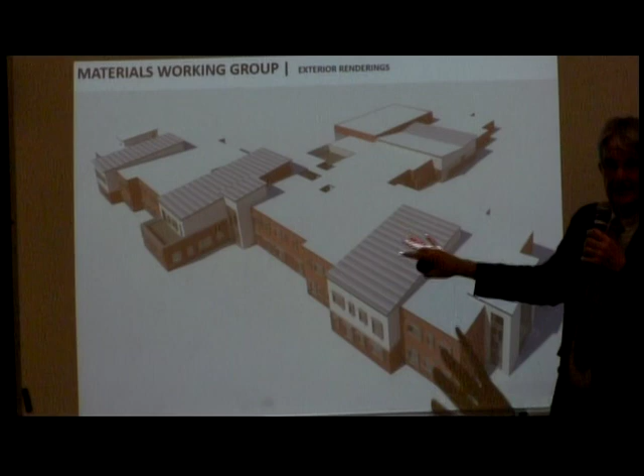There's a little outdoor rooftop space off the classroom at the front, facing south, and then there's a rooftop classroom off the makerspace in the back. All of these sloped roofs colored with this striped gray are due south-facing, and they would support photovoltaics. The idea is that all of this sloped roof is free of any obstructions like exhaust fans or plumbing vent pipes, and it's a clear statement at the front of the building of solar generation, power generation.

This is a view looking in a little closer from the southwest. So this is the 3rd grade classroom at the bottom, 3 classrooms above for 4th grade, the flex space in the middle with that light monitor on the back side of that slope, the exit stair at the end, which also leads to the roof for access to rooftop equipment, which will be up here and probably screened.

We'll be looking at that more as we get the sizes of equipment and put them on the roof. We'll be looking at it in perspective from actual grade in the model to see how visible they are and whether we need to screen them or not. We're going to try to avoid screening as much as possible if we can, because it is an expense.

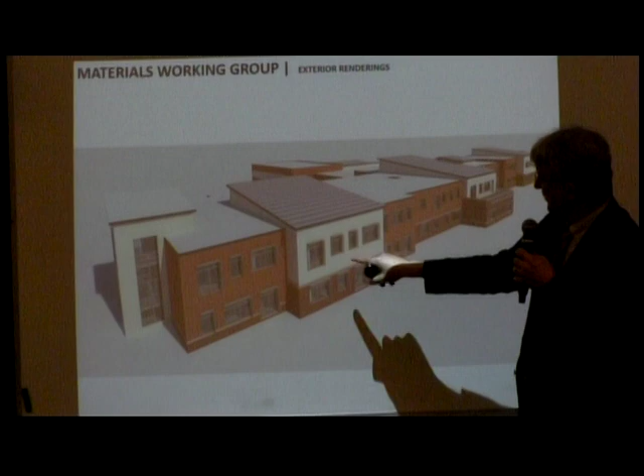Some alternative material where these slope roofs are, and the building pops out a little bit for those classrooms, maybe using an alternative metal material there. At the stair towers, we're specifying a metal type of siding that's a shingle pattern, seamed shingle pattern, and then a strong base with a more lively pattern of brick field on the upper stories. On the south side, also solar shading devices on the windows.

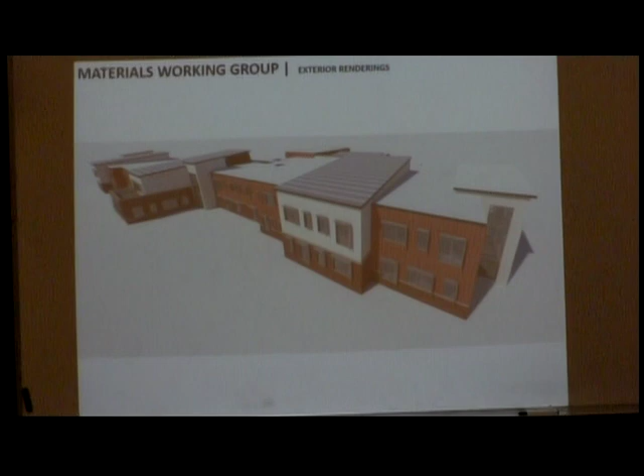So this is a typical classroom. You can see there's a variety of windows, and this is that large window that has the seating area within the classroom. Another close-up from the other angle, southeast.

So as I said, we've got about 10,400 square feet of surface space just on the slope roofs alone, which we estimate can support an 81 kW PV system, at a cost of about $250,000. It would pay for itself in 9 years in terms of energy generation. So we'll be bringing that cost forward to the building committee for consideration at the end of schematic design. It's something that could be added later also through a leasing program. If you buy it yourself, you can get points through the LEED system, but you don't have to.

We've looked at several mechanical systems. I know this is very hard to read. We actually toured several buildings with different mechanical systems with the building committee and staff members, and everybody pretty unanimously felt comfortable with a system described as a displacement ventilation system, which also provides dehumidification—effectively like air conditioning, but not full air conditioning. So in most of the swing-type season weather of fall and spring, it would satisfy the demand for cooling or make the spaces feel cool.

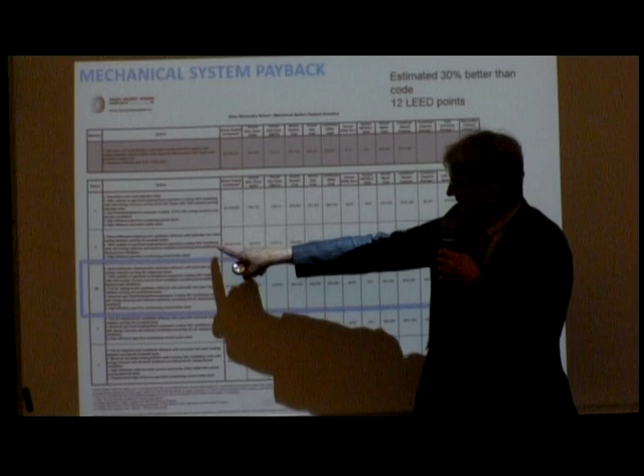So the straight dehumidification system with no air conditioning at all is slightly less expensive. We have opted for option 2A, which does air condition certain spaces—special needs spaces, the administrative offices where people will be working year round, the library, gym, and cafeteria, because they'll be community use year round. Right now, we're estimating the building will perform 30% better than code in terms of energy cost, and will get us 12 LEED points. That will be refined as we move forward, but that's based on the building system and also the building envelope and orientation of the building, and many factors that play into that estimated savings.

And I think that's what we have tonight, but we're happy to answer any questions you might have.

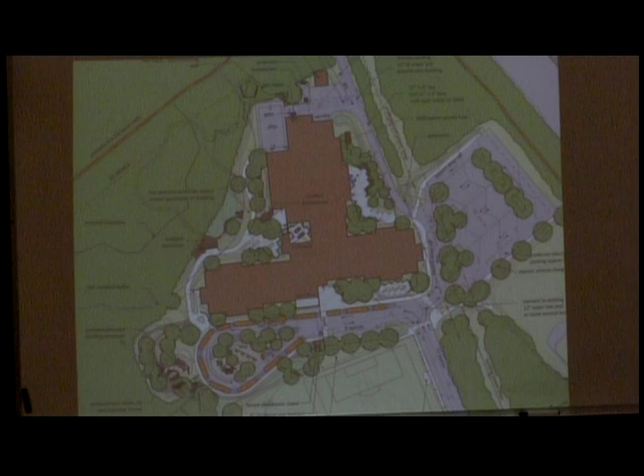For the air conditioning, is the school not going to be used for summer school at all? For summer school, the building is not going to be used at all if there isn't going to be any air-conditioned classrooms?

So I can answer that. It doesn't mean that just because we don't have air-conditioned classrooms, we don't have the opportunity to cool the building—it's the cooling system that'll exist. Right now, Shaw doesn't have a cooling system, so the opportunity will exist should the district decide to use it.

One of the systems we're looking at—we actually toured a school in Carver that had just opened, in the beginning of the school year in September, and it was over 90 degrees the whole week we were there leading up to the opening of school. It was very, very hot and humid weather. That building had just the displacement, no air conditioning system, and it was very, very comfortable. Everyone noticed it, and the staff had been there a full week and had noticed it being very comfortable. When we were there, the students were there as well, so it was fully occupied.

Yeah, when I was on that tour, I thought it was air conditioned. I was surprised to know that they didn't have air conditioning.

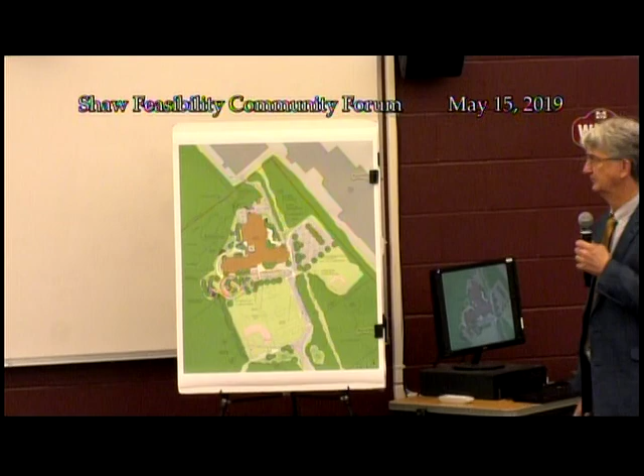So Peter, if I could segue to a big picture comment about this plan—I'd just like to offer that this plan resolves three of, I think, the most challenging facilities issues that the district has. The first is it addresses our issues with Shaw, which we've investigated fully and realized we have to do something about. So this new building will do that, but also you'll notice that it's a 3 through 6.

And so by bringing the third grade up from Elmwood, we've resolved any kind of enrollment capacity issues at Elmwood for the foreseeable future. We're able to free up those classrooms in case there's a spike in our enrollment.

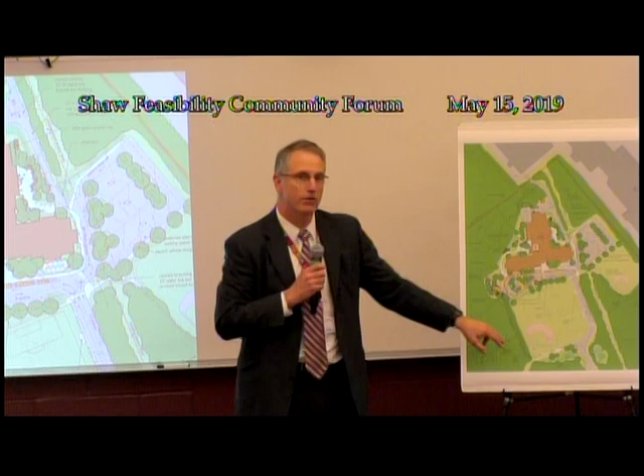Secondly, we're able to move the high school baseball field to the new Shaw site. That resolves an issue with our athletic fields because we've been looking at renovating our fields for a while. Behind the high school we have a D-shaped track, which is in very poor shape. We have a baseball field inside that track, which I don't know if there are any other schools in the country who have that design. It's a design that's not really meeting our needs anymore. But because we couldn't find a suitable site for the baseball field, we weren't able to make any changes behind the school because we had to remove the baseball field to redo the track. By doing this, and getting a little help from MSBA, we're going to be able to now remove the baseball field from back here and renovate those fields.

And it just so happens that our athletic director, Pat Marr, is here. I was going to wonder if you could share a few thoughts about the project right now and what the plans might be.

It's going to take a while. Just go with it.

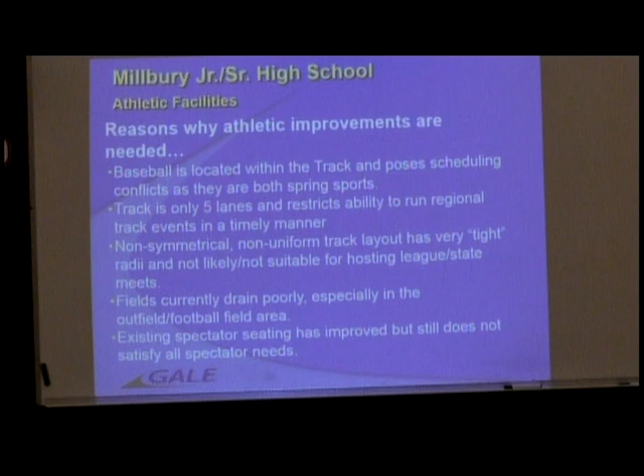So our improvement is needed, as we've already mentioned. Baseball is certainly a scheduling issue, obviously programmatically, and also just the conditions of the facilities that we're scheduling on. There are certain needs there as well. So just some photographic evidence of what we're looking at.

Our lights are significantly cost prohibitive. They're older, and the ballast and the bulbs are certainly not the most energy efficient, as we talked about in the Shaw project.

So this is Gale's approach here. We're really in the master plan concepts, and we're meeting with Gale and continuing to work on our ideas about programming for our high school site, now that Shaw is moving forward with a baseball field there. So we're in the middle of that process. This is the most recent schematic design from Gale Associates that would overlay. This is their ideas, I guess.

Have a new rectangular synthetic turf field, which would be football and soccer, or any rectangular sport. If we so choose to expand our offerings, it would support field hockey, lacrosse, any rectangular sport would be certainly suitable on a facility like that, especially with soccer being the largest.

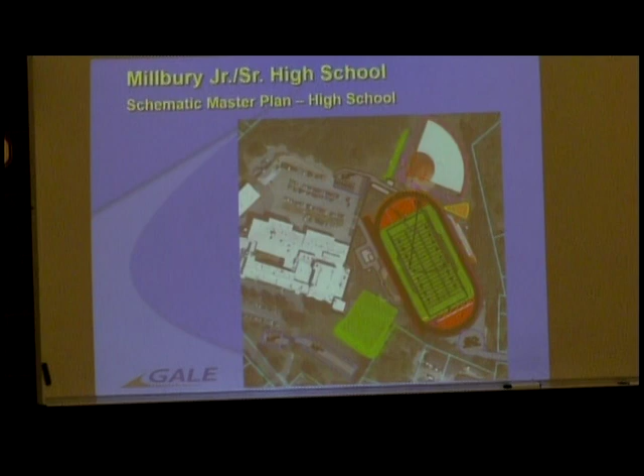Certainly a venue where there could be opportunities for us to host several significant events, whether it be rectangular or track-wise. We certainly would be a location that not only the district or the section, but potentially even the state would be interested in terms of bringing their events or venues here, closer to proximity of different roadways and things like that. So it certainly would allow us to do that, and with increased parking spaces, kind of alleviate some of that concern for larger events. I think that's about it.

Essentially kind of revamp up here and allow us to dovetail into the Shaw construction project, allow baseball to have that new site, and then really dive into creating something very special for our athletic department up here. So I certainly would be happy to entertain any questions. I don't know if I'll know the answer, but I'll do my best, or talk to Mr. Bedard, and he'll have the answer.

Yes. My concern is more for the girls' softball field, and since it's really not going to do much, it's not going to change much, could we make that a primary concern for them? I mean, we've always been secondary, actually. We have always been like last on the list of improvements. And I really feel they should maybe come first, since they're not really...

So it does a kind of poor job of explaining the magnitude of the change for softball. The softball field is only moving about 40 to 50 feet, but it is a significant change. It would be completely stripping the entire site, adding drainage, adding much needed drainage, adding irrigation, as well as completely regrading the surface. And that's why the rectangle here also helps, because it allows us to alleviate softball from any sort of practice facility that we may be using it for now, even though this particular year we didn't really do that very much. So certainly improving the softball quality at the high school is very important to us, and very important to the project, because without softball being able to be rectified from what it is currently, it's certainly a big piece of what we're doing here. So just because it's moving slightly, it does have a little bit more prominence than it looks in this photograph.

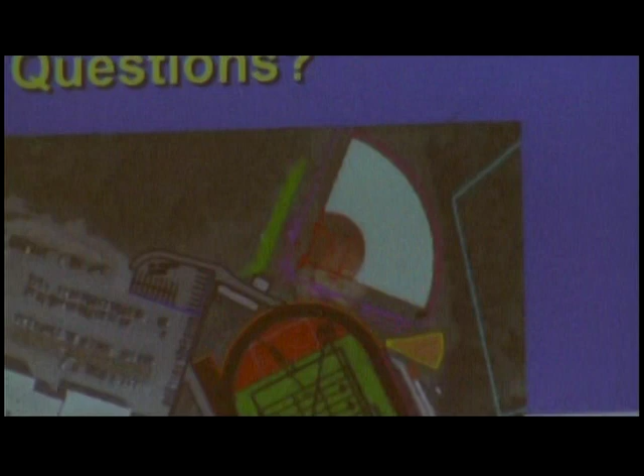Yeah, and I mean, I think we have certainly tried to improve the softball playing facilities, whether it be Windle Field, that we've certainly top dressed. Softball, we've spent a significant amount of money trying to improve both sites. And certainly softball is a priority for us in terms of finding a complete home. We certainly took into consideration, when we were thinking about where baseball would fit, making sure softball still had the opportunity to participate at Windle Field, where the youth program certainly sits. Currently, Windle Field is our best softball field in town right now in terms of drainage and infield mix and things like that, which we have added in the last year and a half to two years. So we've done some improvements there as well. So I think we have worked to try to improve both softball facilities so that they can become opportunities for both our programs to participate in, as well as the Millbury Youth Softball as well. Yes.